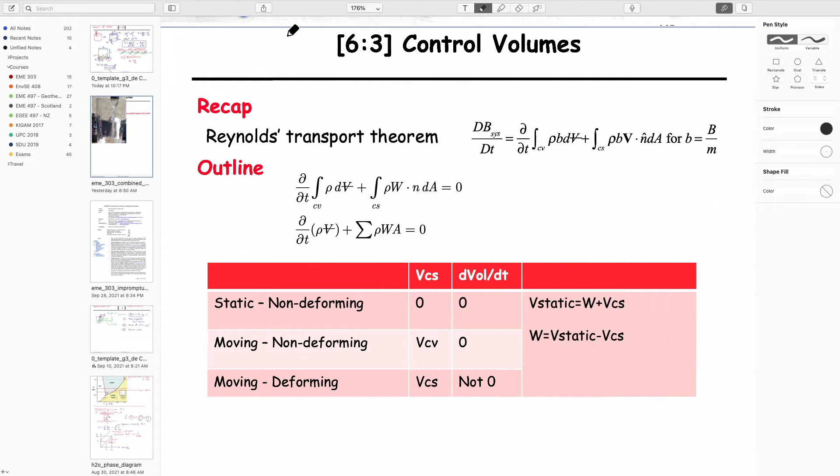So let's go back to our stuff. I will say that I'm going to do this in a much more simple way than I've done in the past. So if you want the gold standard version, last year's video for 6.3 is there. I'm not sure exactly how people take on the complicated way, and I think I have an easier way to explain it today anyway, so I'm enthusiastic to share that with you.

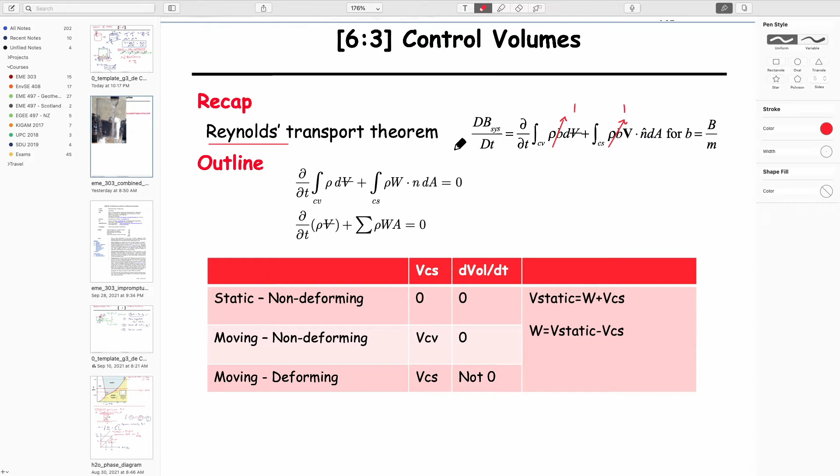So what do we talk about? We talked last time about the idea of conservation of mass. If we use Reynolds transport theorem, we can apply that to any quantity. We chose to apply it to mass, represented by this term B, which comes to be 1 in each of these cases - B is just mass divided by mass. This term on the left-hand side is 0, and you don't need to know that.

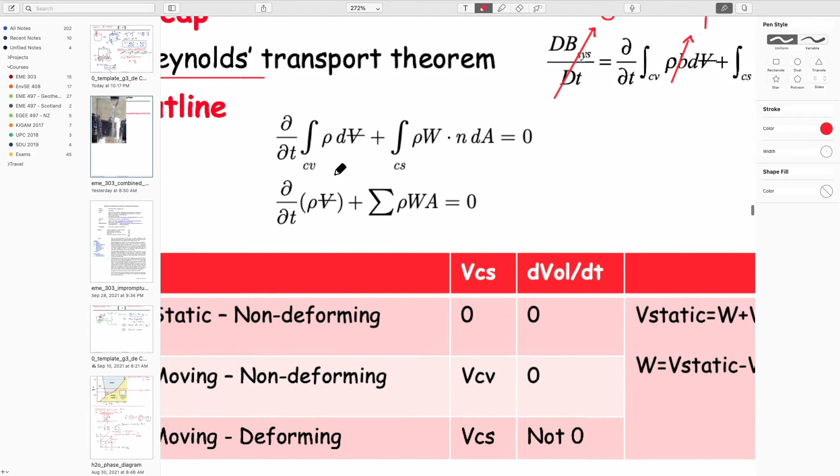What you need to know is what this looks like, and the equation that we will use is this. It relates to accumulation - so the left-hand side is accumulation. Perhaps I can write that: this is accumulation.

Mass out minus mass rate in, actually it's mass rate in, equals zero. That's the physical meaning of this expression. This term here is this, and this term here is this.

So am I using a blunt instrument? It seems a bit more blunt than normal. And so this can be written as this. So this is the expression that you'll use.

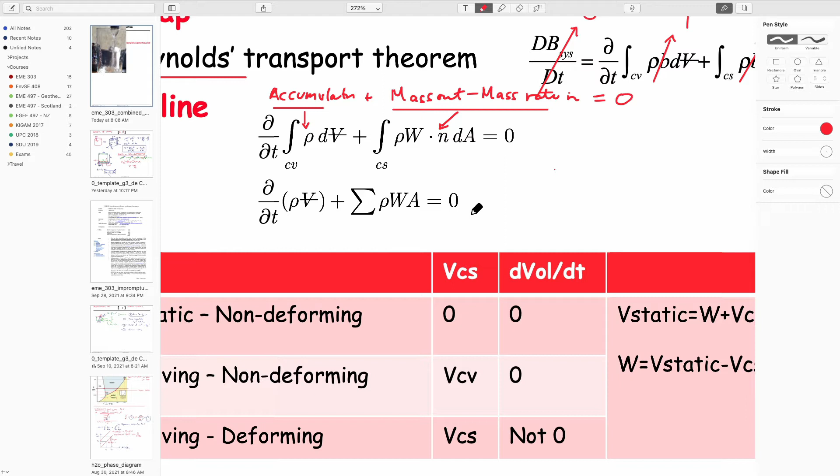You'll notice that we have taken this velocity here, and we've replaced it with a W. That's the one thing we do. So these are standard: time, density, density. This is a velocity, relative to the boundary velocity, which we'll talk about. We talked about this being a dot product, which just gives the sign to this that accounts for the mass in or mass out, and this is over an area.

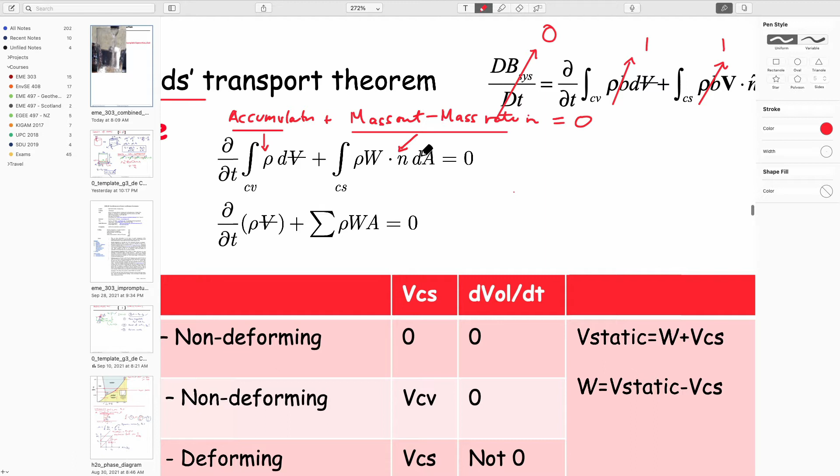The easiest way for you to think about this is to draw it as we did on Wednesday: you have a control surface, which is the surface that you complete this integral over. That surface encloses a control volume, the area volume inside it, because it has a distance into the page. We would like to be able to look at the velocities coming out of it and the velocity of flow into it.

The dot product that we have here represents this: if the flow is out, then it's parallel to the normal to the boundary, as we talked about last time. This is the unit normal, and so these are congruent with each other. So this is, in my parlance, positive out.

And it's negative in. Oh, that's my son saying rabbits. Does anyone say rabbits, rabbits, rabbits? First of the month? Yeah, same deal. You heard it here. Good luck for the rest of the month if you say that before you say anything else in the morning. Good superstition to have.

So this is a velocity out, and so the mass rate of flow out would be equal to the velocity relative to the boundary times the area times the density, quite literally. So that's what this is here: density, velocity, area. This is a mass rate, kilograms per second. And the sign of it depends on our knowing whether it's out.

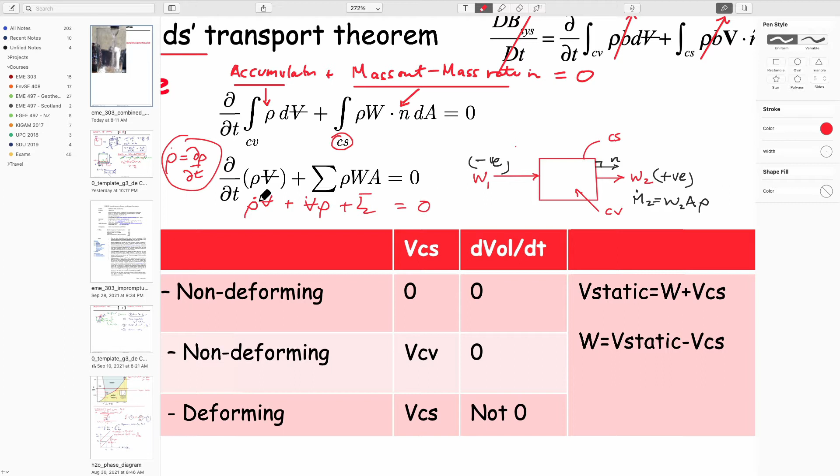This allows us to accommodate the fact that the density could be changing, like pushing air into a tire. The tire volume doesn't change very much, but certainly the density of the air changes. Or you're filling a beaker: the density of the water doesn't change because it's incompressible, but the volume of the control volume, which might be the whole surface of the water as it goes up, does change.

I guess we should mention that for these systems, if you look at time versus volume: if you're filling a beaker, then the volume of the beaker increases with time. So positive is if V is increasing, right? Just sign conventions we're talking about so far.

And I guess the other one would be that if you're pushing air into a tire with time, then density would do this, and this again is positive. So if density increases with time, it's positive. If volume increases with time, it's positive. And if flow is out of the system with time, it's positive. We just have to account for those conventions, and it'll appear normal when we do these things. So that's the first part.

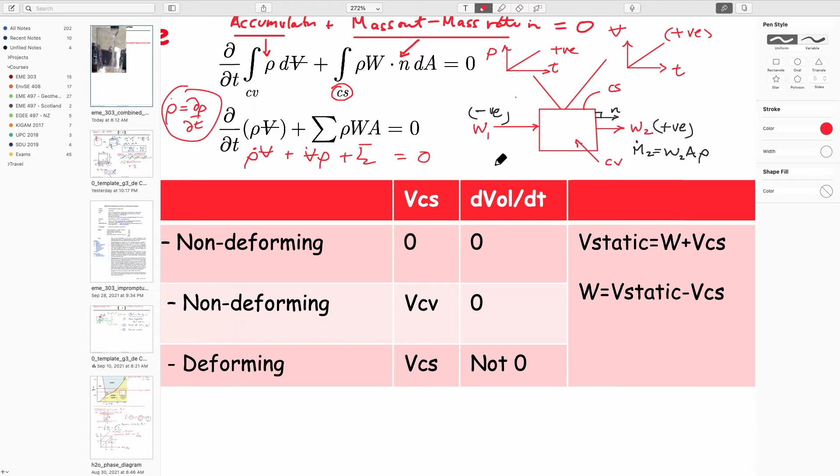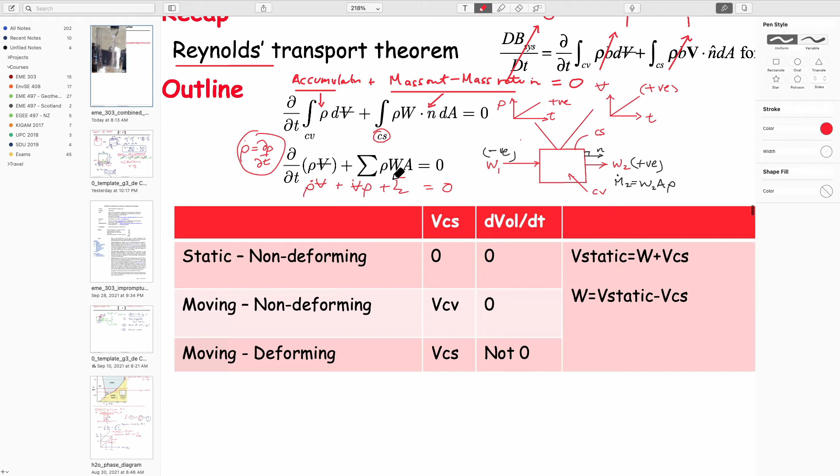The second part is that we've changed this velocity here to a relative velocity. And so we've just looked at the boat. I love drawing this boat. Here we go, this is my fire tender. Oh, it's fantastic.

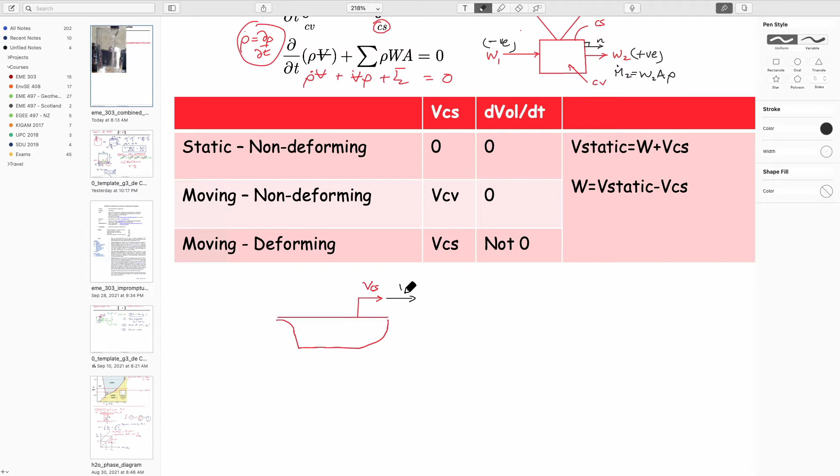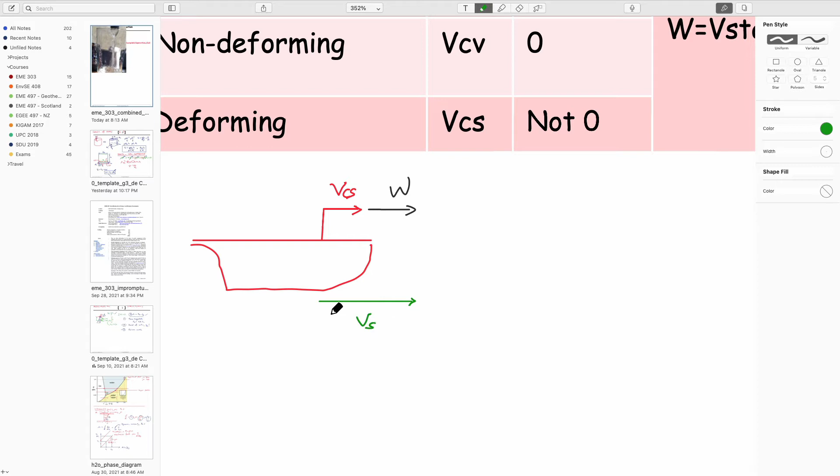This fire tender is moving with some velocity of the control surface, and it's squirting water out of the control surface at some rate W. If you combine both of these together, and I draw it here, then if you're standing on the dock watching this, you see the boat moving at 1 meter a second. You're squirting water out at 1 meter a second. So the velocity to a static observer is 2 meters a second. That's what you see: boat's moving, squirting.

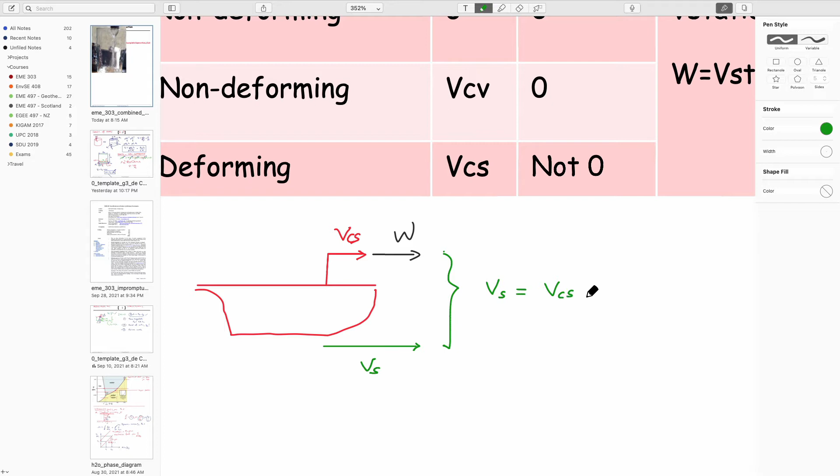You sum those, it's a vector sum. These are vectors, so actually it's not just a magnitude in the x direction, but there'd be x, y, and z as well. But let's just think of it as one for now, not worry about the fact that they're vectors. So we can write, because they're vectors, if we take these two together, that velocity static is equal to the velocity of the control surface plus the velocity coming out of the system.

We could also draw a control volume around here. So this is the control volume that we're looking at. Really, if you're squirting water out of here at 1 meter a second, it doesn't matter what the boat is doing. If you have 10 kilograms of water in the boat and you're squirting it out at 1 kilogram per second, then it'll take 10 seconds to deplete. It doesn't matter if the boat's going in any particular direction or you're squirting in any particular direction, you'll deplete the mass within the boat in 10 seconds, either way.

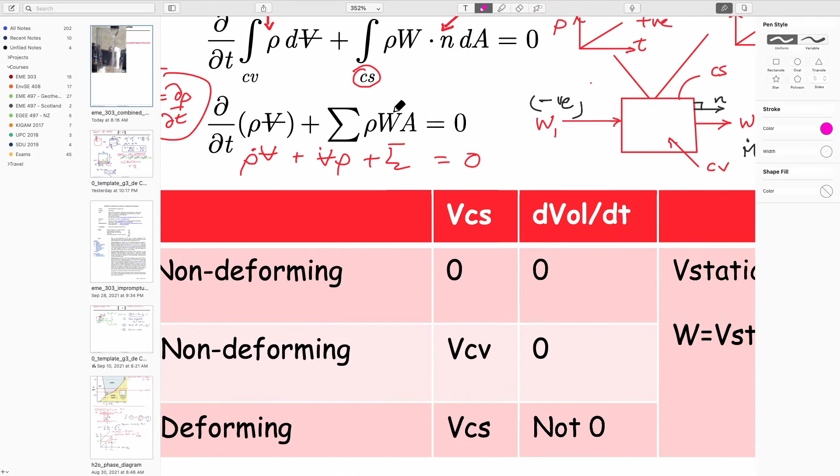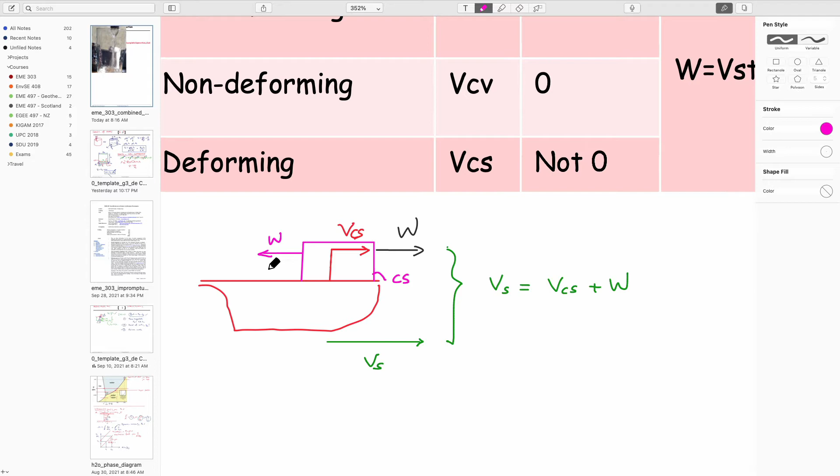All I'm making the point that the reason W is here instead of this velocity here is that it makes sense that if you're conserving on a control volume, so if this is our control surface here, this magenta line, then it makes sense that we use the relative-to-the-control-volume velocity in depleting volume from that control volume. Right? That's all we're saying. So this table merely makes the case that this is what the behavior should look like.

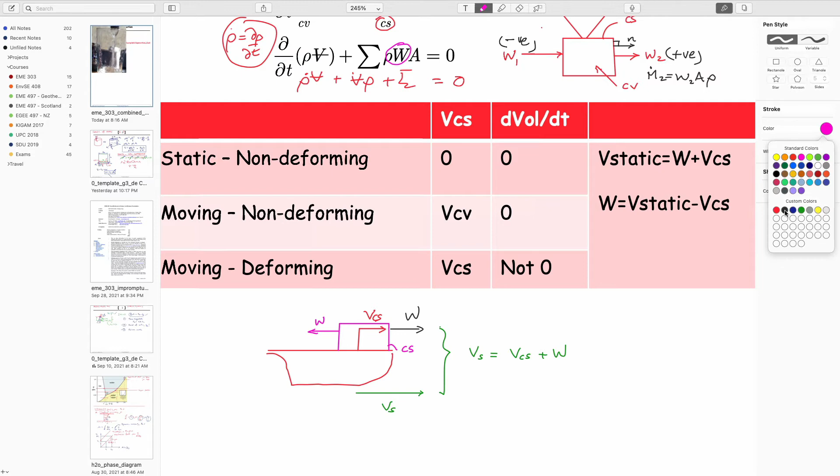I can get rid of this right-hand side, I think. We have these three different cases. Remember, we talked about the pipe. We could take a section of the pipe and have a control volume in it, and that this was static and non-deforming. In this case, the control surface is moving at a velocity which is 0, and because it's non-deforming, staying the same size, the volume with time is not changing either. This is V dot, uppercase V dot.

If we have a moving and non-deforming one, well, that, if I can draw it, is my jet engine. This isn't changing size, but it's translating. This is the velocity of the control surface, and it's actually the velocity of the control volume, right? Because the control surface at the front is moving at the same rate as the control surface at the back, since this is not concertina-ing, getting larger. So really the velocity of the control surface has to be the velocity of the control volume. Kind of semantics maybe. And of course, non-deforming, so it's not changing volume with time.

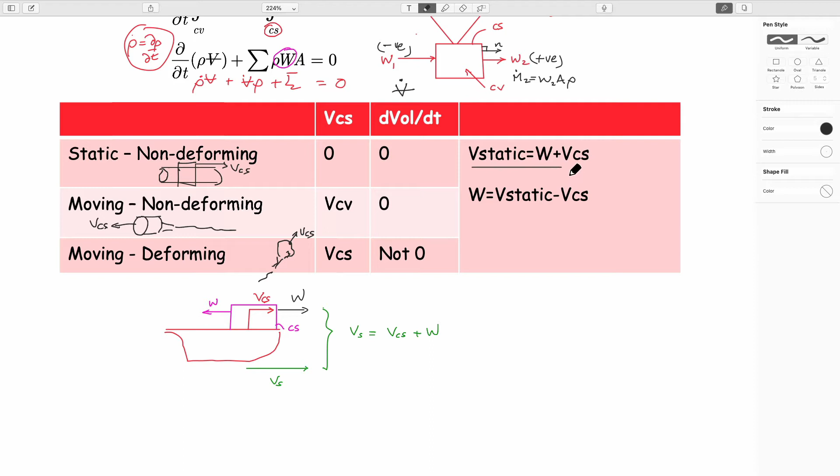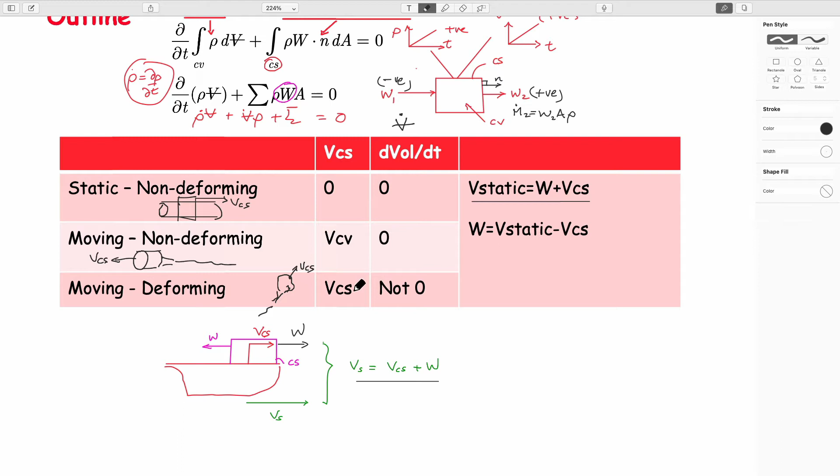Since we've said it's important to define our behavior relative to the boundary velocity, we might want to rewrite this equation this way. We'll need these concepts when we talk about the other conservation law, and we'll use them today to illustrate exactly what I'm trying to say.

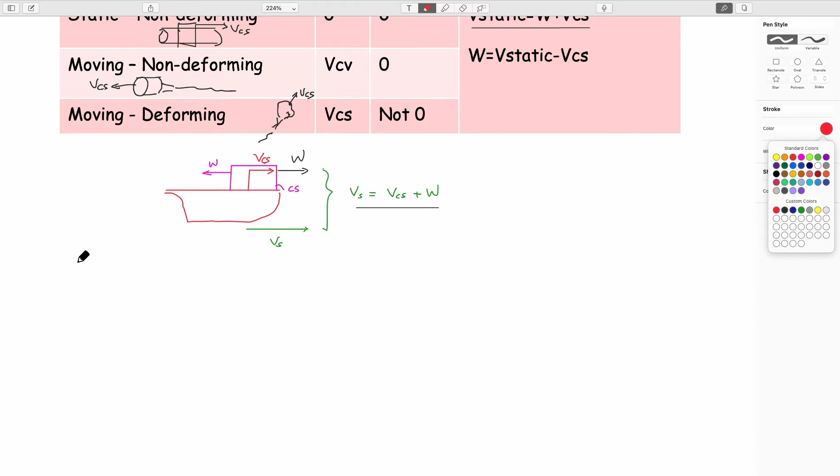So let's do something with this instead of just talking about it. So what I plan to do is... is this writing big enough now? Yeah, plenty big enough for you. So what am I going to do?

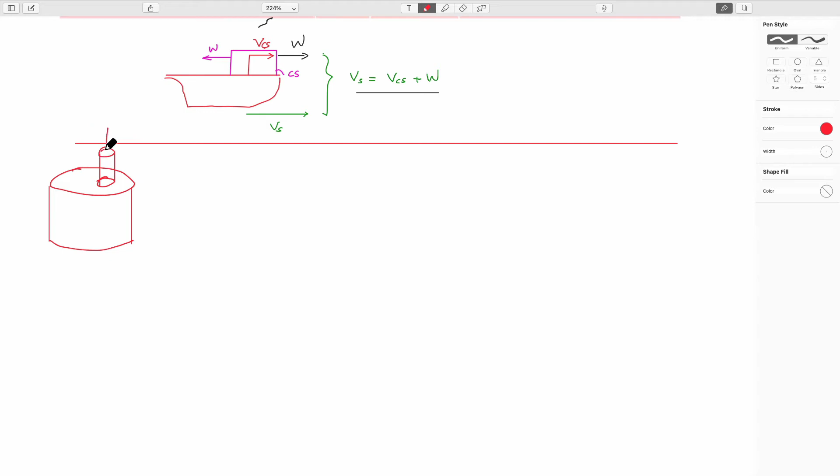What I'm going to do is take the geometry that we looked at. This is the problem geometry, so it's a beaker. In the geometry you saw with the glass, you have a jet of fluid coming down and slowly filling up this volume. That's the one we looked at, but that's just too difficult.

So I'm going to translate that into something equivalent but different. Instead, I'm going to fill it from the bottom, with fluid coming up into it.

The fluid comes up at some velocity v1. It has a surface here, and I'll have a height which is h0. I'll have an area A1, which is the area of this jet.

Remember, the other setup was difficult because not only is the fluid coming down, but as it comes down it tapers, since the water accelerates as it falls. We get rid of these problems just by filling up the beaker from the bottom. We have some height to this, h, and some area of the bucket, and we use that to write our equations.

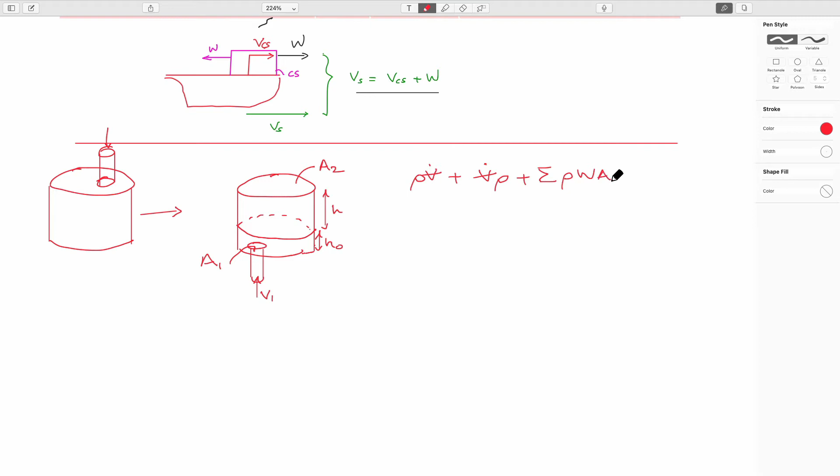So you'll be sick of this equation - well, you might be sick of it already. But this is necessary for us to write. So that's the expression we have.

So what do we have in this particular case? I guess I did that wrong, let me get rid of that. One of these needs to be a rho dot, the change in density. So what's going on here? It's water coming into it, so the change in density is probably trivial, and we can get rid of some of these terms - this term is going to be zero, we don't care about it.

We have water coming in through the bottom, so we worry about that, and we have a rate of change of volume occurring. The volume, depending on how we draw our control volume, is going to change, so we need to take care of this.

So if we want to solve how long it takes to fill this container, what do you do? It's probably easiest to write this as: if you know the volume of the bucket, and you divide the volume by the rate at which you fill it, this equals a time - volume per time, one over time is this. So you have a 10-gallon bucket, you pour in a gallon per minute, it takes 10 minutes to fill. That's all that is, and that's the easiest way to do it.

In this particular case, the volume is equal to, in very simple terms, A2 times H. The volume rate is going to be equal to V1 times A1, and that's your answer. We're going to do this problem multiple ways, and we should always end up with this intuitive answer you've already got: A2H divided by V1A1.

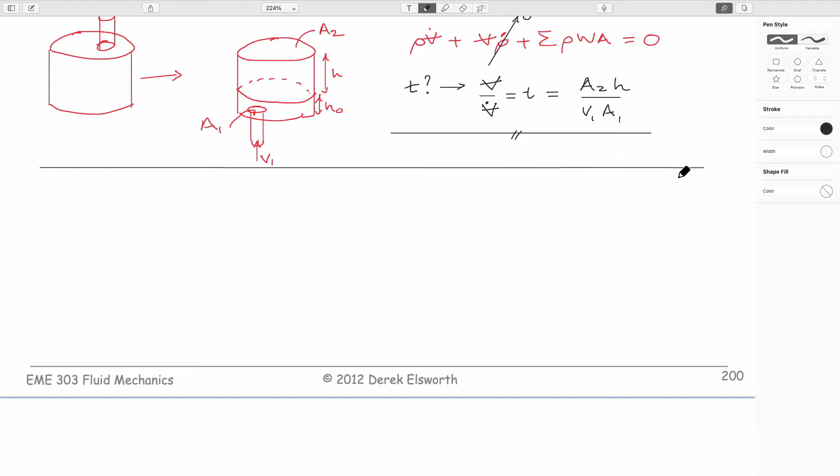So we start off with an amount in there just because it's easiest for us to do that, but the time it takes to fill the rest of the thing is this amount of time here. So what we could do is divide this up - if I draw a line here to cap it off, we're going to do each of these, this one and this one.

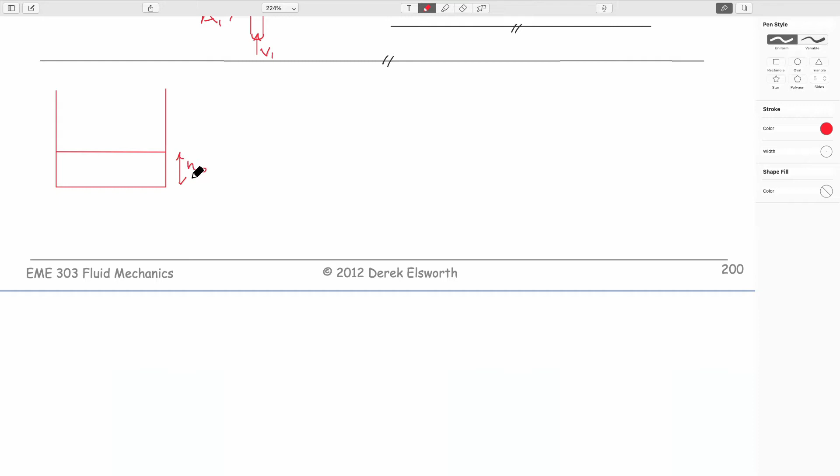So this is how high the water is up to, this is H0, I guess, what we've called it. This is going to be the rate at which we put water in. So over a portion of this, we have water going in at some rate, V1. This length here is A1. And this surface here is rising at some rate.

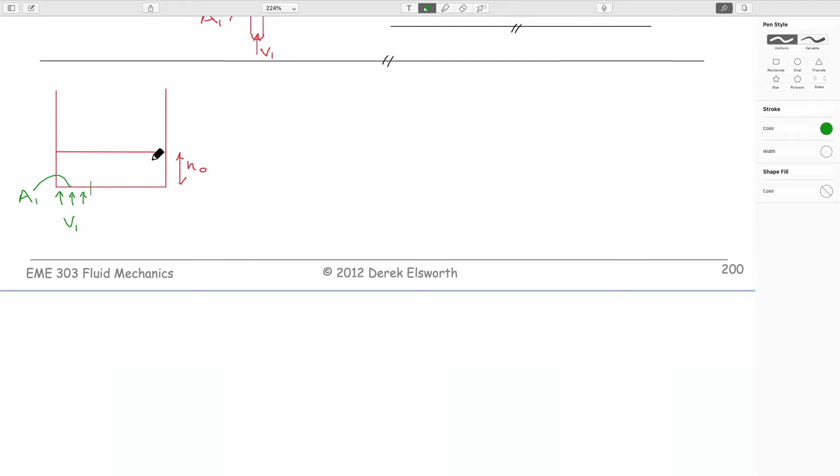And so what do we want to do? For the first of our conditions, we have, this is going to be blue. So this is 1: static, non-deforming.

So let's draw a control volume. So that's our control volume. So we can write our expression if we like for that. So I guess I want to switch back to this.

So what do we have? Rho V dot plus V rho dot plus sum of rho W areas equals 0.

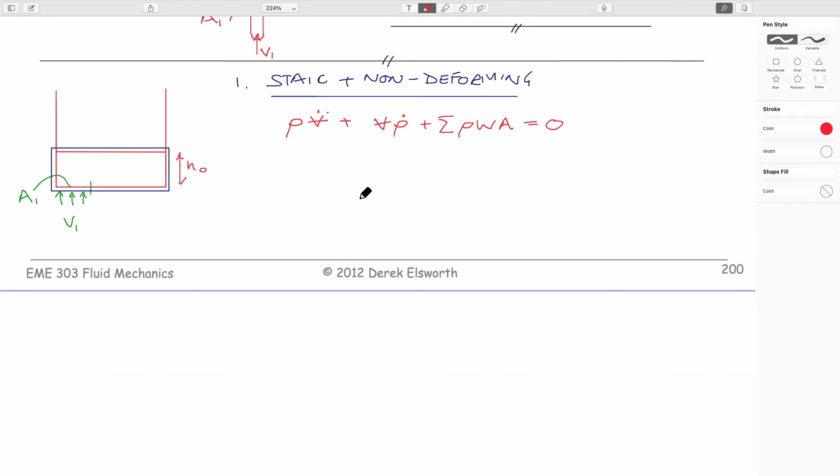What do we have going on here? Well, we clearly have a couple of things going on. We have some fluid coming out of the top of this volume at some rate. This is our control volume, I guess I could label it. This is going to be V2. This is going to be area A2, if you want to put that there. It's not really the cross section, right? Because it's an area, not a length.

And so this is just the answer that we already had. So if you write the rate of change of volume, it's going to be 0 because it's static. I missed out some letters. The rate of change of density is going to be 0.

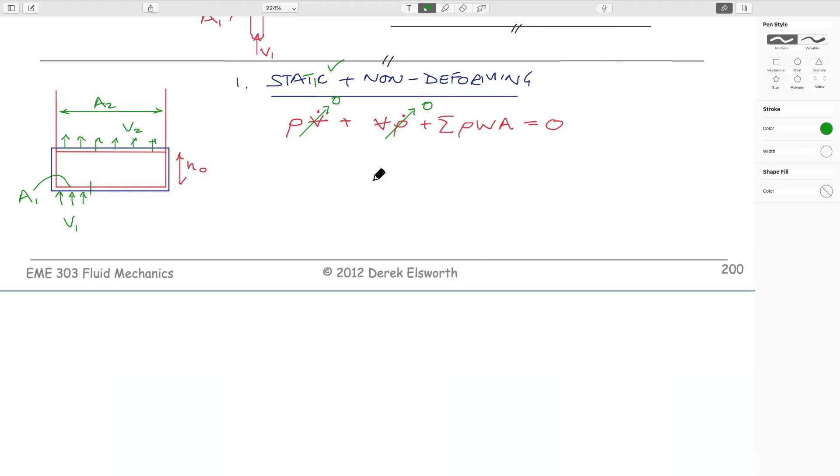And it's going to be just the sum of these two components. So if we write this out in longhand, it's going to be quite simply rho V1 A1 plus or minus rho V2 A2 equals 0. What's the sign convention? Flow in is negative by our convention because of what we said about this boundary here. This is the normal, so this is going to be negative V. Flow out is positive for the same reason, so this is going to be positive.

And so we can get rid of the densities if it's not compressing. So V1 A1 is equal to V2 A2. And so we can just use that to define V2 is equal to V1 A1 over A2.

And how do we calculate how long it takes to fill? Well, we can do it in terms of a velocity, right? This is h. So velocity is equal to length over time. So I guess we should rearrange that in terms of time. So time is equal to...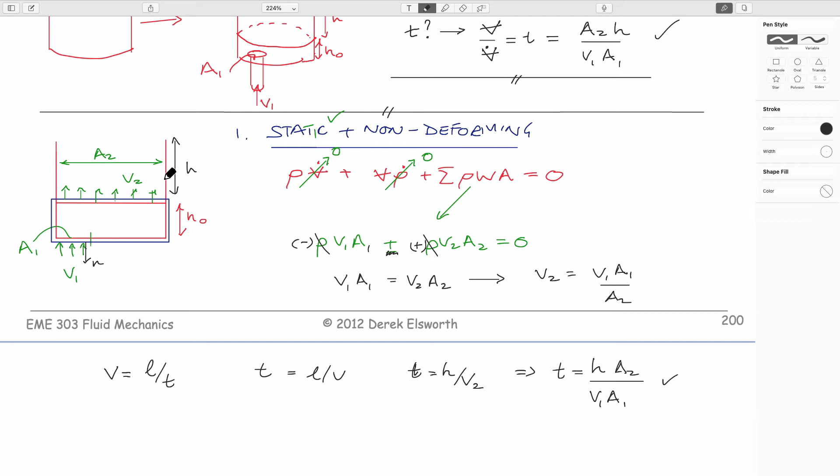So the intuitive way to solve this is exactly what this gives you, the velocity coming out of this static control volume. It doesn't solve this directly because you have to calculate how long it would take to rise up here, but that's the result that you get. So that's the first of our problems.

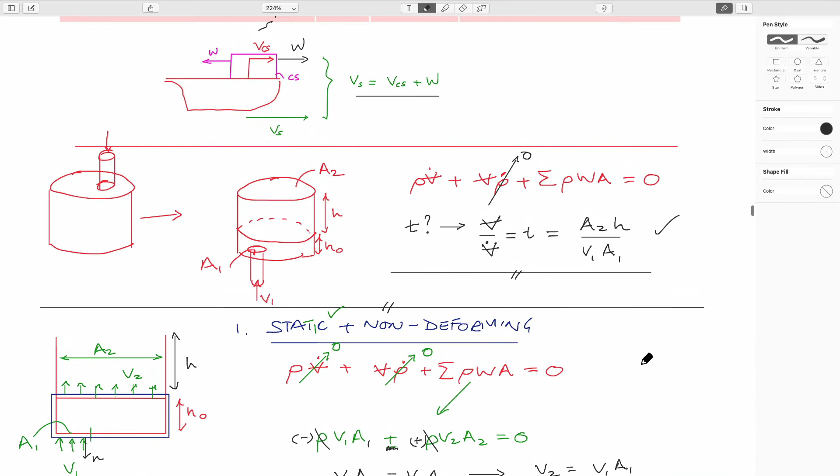So the second is moving and non-deforming. Let me see how clever I can be with this. So let's get back to this. So I guess this is number 2. So this is moving, but not deforming.

So let's see how we do this. Let me see this. All right. Ah, perfect. God, I'm so pleased with myself.

So let's see if we can draw this same container, but with something else done. This is a non-deforming container, so it has to have the same control volume, but what this container can do is physically float up to the top of the bucket. And that's what we're going to allow it to do.

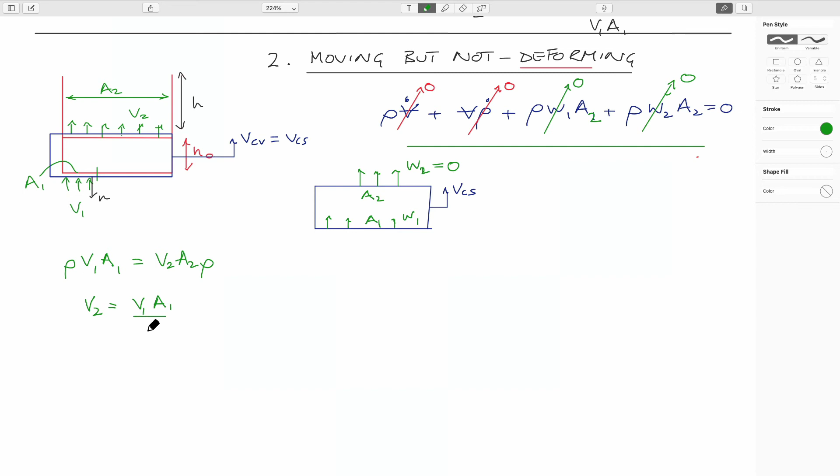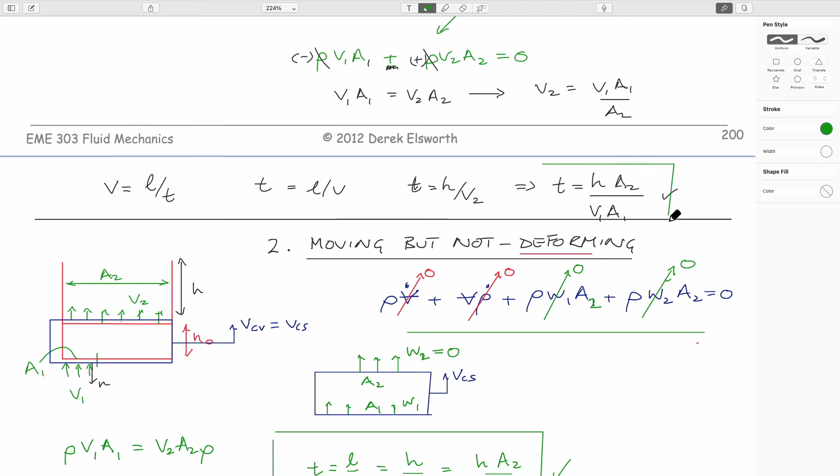And we again get V2 equals V1 times A1 over A2. And again, we have to use this expression: T equals length over velocity, which is the length it needs to travel, h, divided by its velocity v2, which equals h times a2 over v1 a1. Not surprisingly, since it's the same problem, we end up with exactly the same result here, as we do if you think about it in terms of how long it takes to fill a bucket.

1 kilogram a second, 10 kilogram capacity bucket, takes 10 seconds. That's all we're doing.

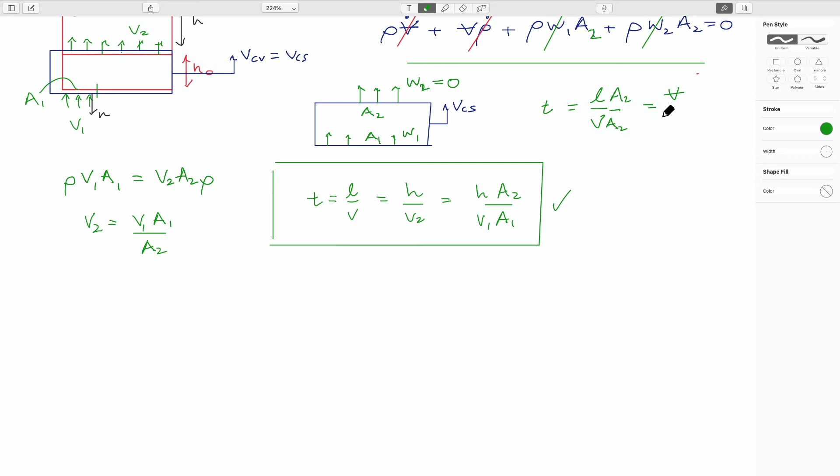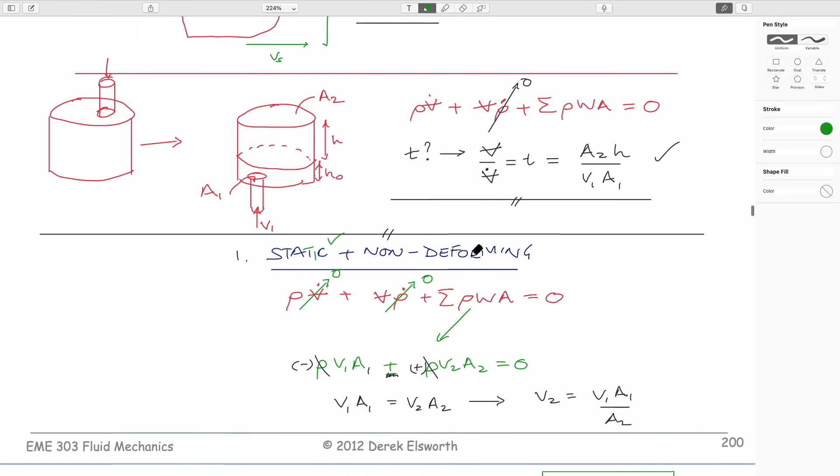So instead of writing time as length over velocity, we could also multiply both top and bottom by area 2 and area 2, and this would become a volume, and this a volume rate, just as we talked about before. Whether you use mass rates or volume rates, if the density isn't changing, it doesn't matter much.

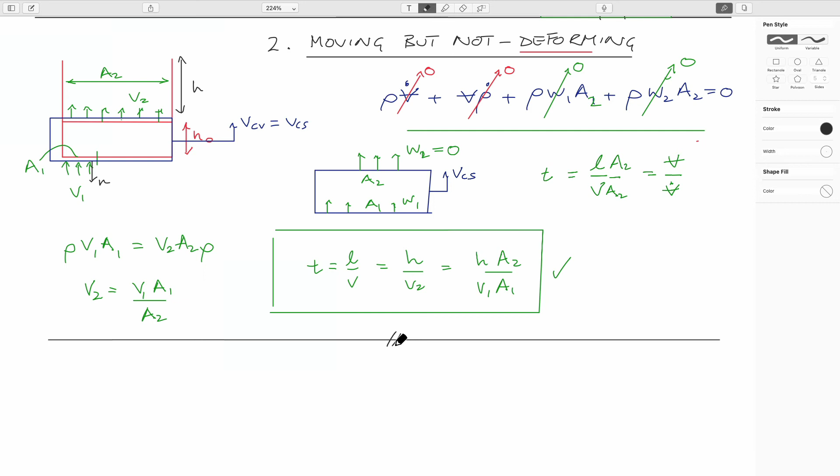Okay, so it becomes a bit academic at some stages, but let's do the other one as well. We've talked about three of these particular ways of doing it. And believe me, if you think this is complicated, look at 6.3 from last year and see if your head explodes based on that.

Okay, I'm going to be fancy again. Is it worthwhile me trying to copy these, just like I did last time? I guess it'll move some of it down. Some things we don't want moved down. Okay. And again, see if I get rid of the control. So, all right.

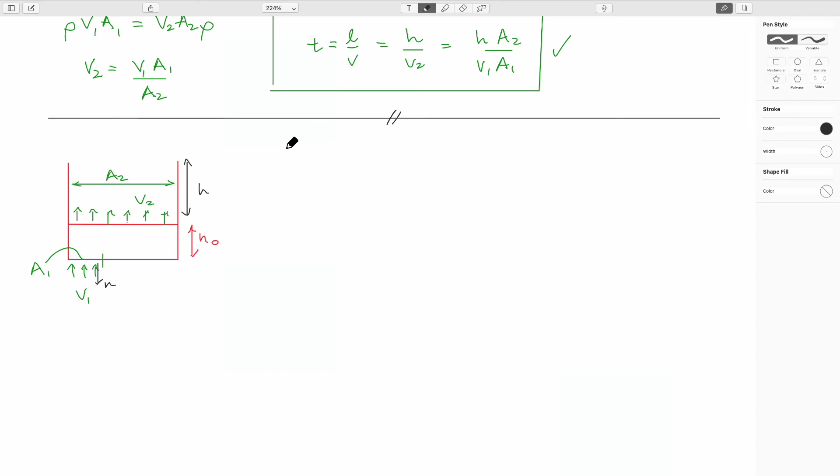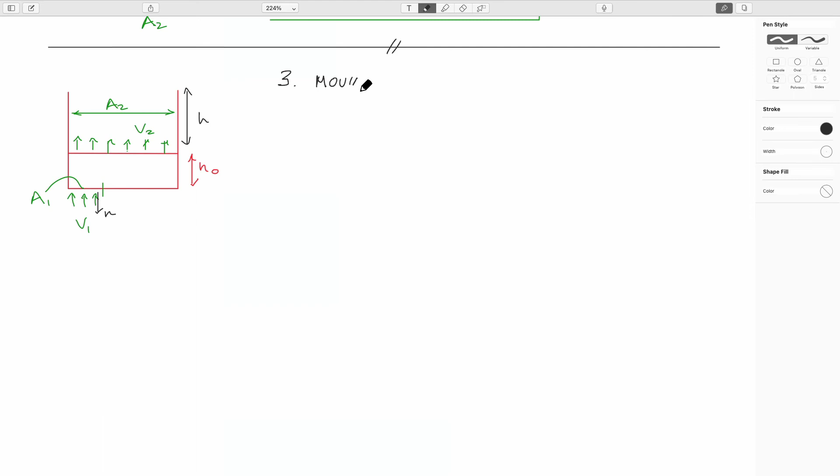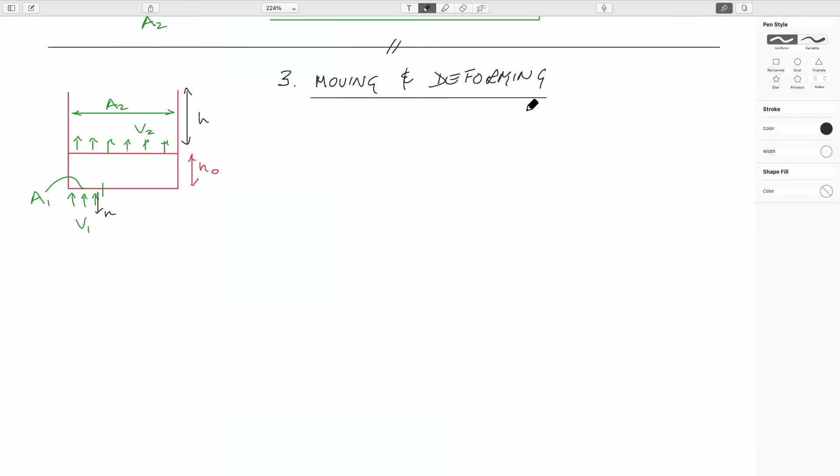Where's it gone? So the third one is going to be, what is it, what order do we put it? So it's moving and deforming. So for this, what are we going to do?

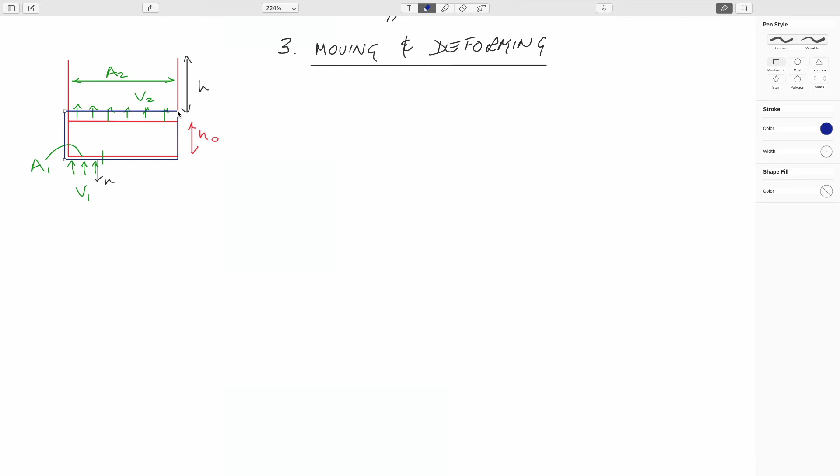We're going to do the same as before. I'm going to draw myself a nice little box around it, and this box is now going to be different. So this is the box at how it starts, but instead of translating upwards, it's going to do this: it's going to grow with time as it goes upwards. Physically, it's going to be anchored at the bottom, so we have to define what the behaviors are.

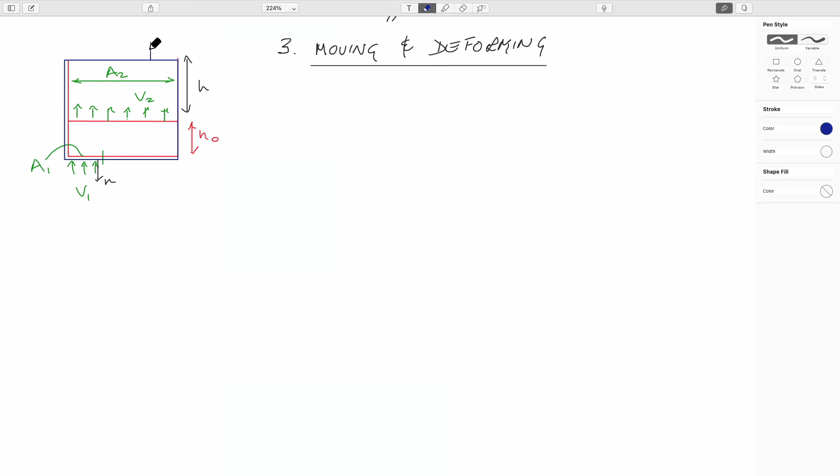This is going to be the velocity of the control surface. The velocity of the control surface here is 0. The velocity of the control surface on the other sides is 0 as well, but we don't care about those. So it's going to grow from this magnitude here up to this.

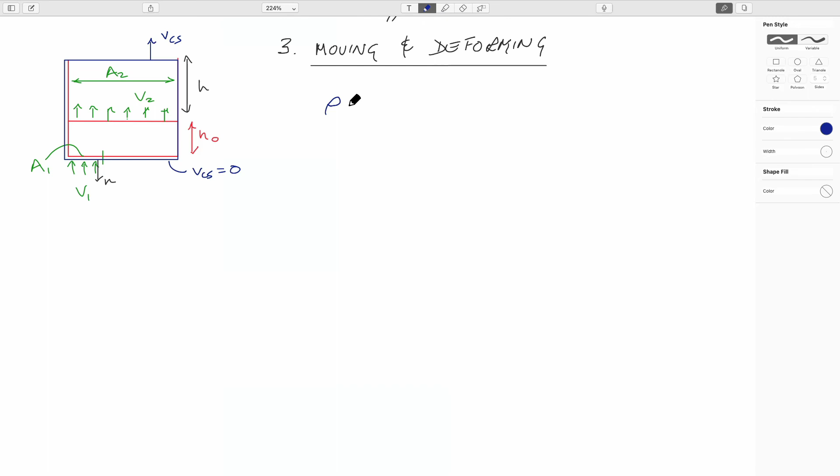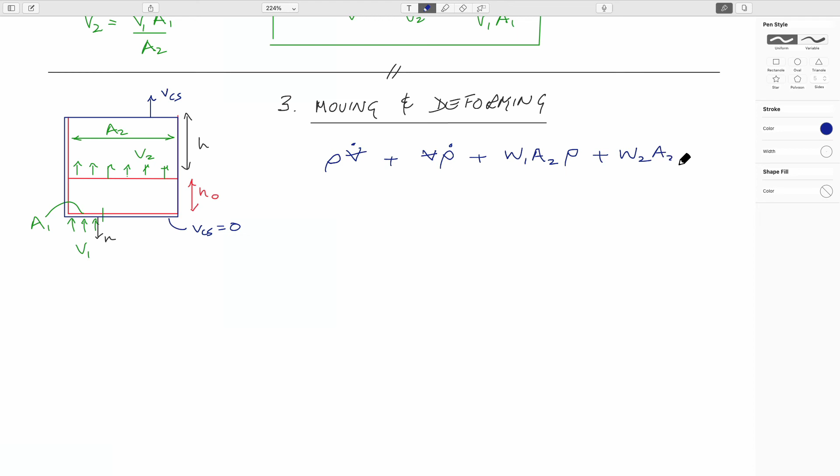So again we have to write that same expression: density times rate of change of volume, you should write it the same each way, plus volume times rate of change of density, plus W1 A2 rho, plus W2 A2 rho — I deliberately put A2 there — equals 0.

And I'll draw the box separate from itself, just to get an idea of what's going on. It's quite straightforward — I say everything's straightforward — this is the velocity of the control surface, which is equal to 0.

And we can look at the relative velocities of the fluids. The fluid is coming in through the bottom, so we can look at that fluid velocity here. What's that going to be? This is 0 because nothing's happening. The velocity here is going to be into here, it's going to be W1.

Actually, I don't want that to be — I made a big point of making the case that I wanted that to be A2, but I don't. What's going on? A1. So this velocity here would be what we called V1 before, A1 and density.

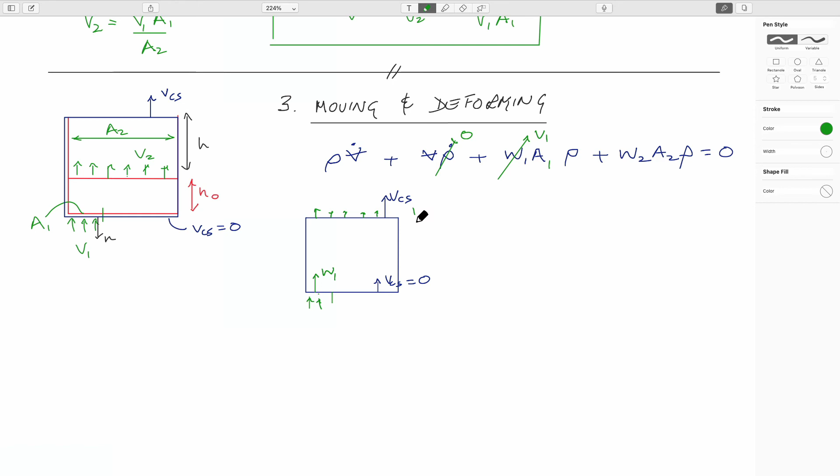What is the velocity on the top surface going to be? Well, again, this is moving with exactly the same velocity as the water — it's the top of the froth on the beer, and so it's moving up. So W2 has to equal 0 for the same reasons as in the previous case, which I've erased, because it was translating up as a float. In this case, it's translating up, but it's stretching the volume, and clearly this is not going to be 0.

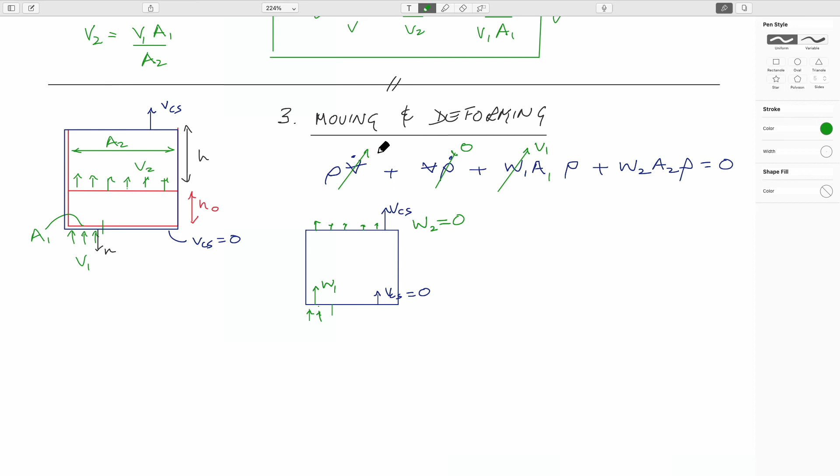And so we end up with an expression which is density times rate of change of volume plus V1 A1 rho. This is a velocity, and if we draw our unit normal outwards, this is negative, so that just means the velocity is negative and it's equal to zero. We can probably get rid of the densities.

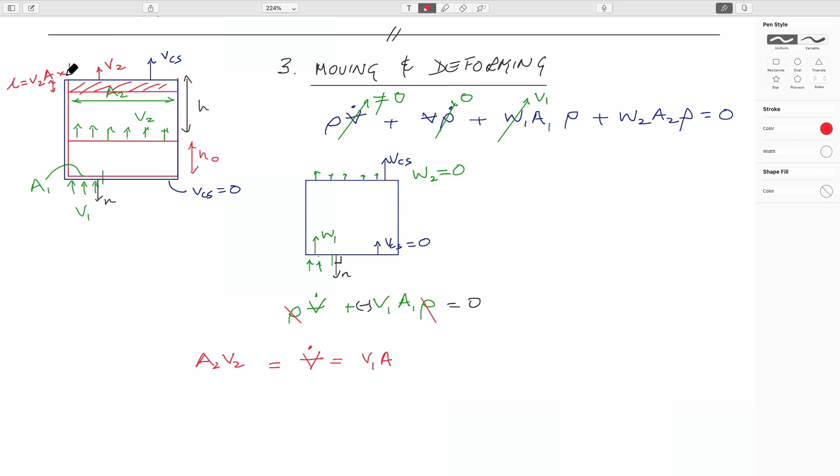So in other words, the volume change is equal to V1 A1, because this is negative. What's volume change? Volume change would be area 2 times V2. An incremental change in volume is given by this surface going up at velocity V2, making a new volume, which gives you this length. So this length is equal to V2 A2 times T.

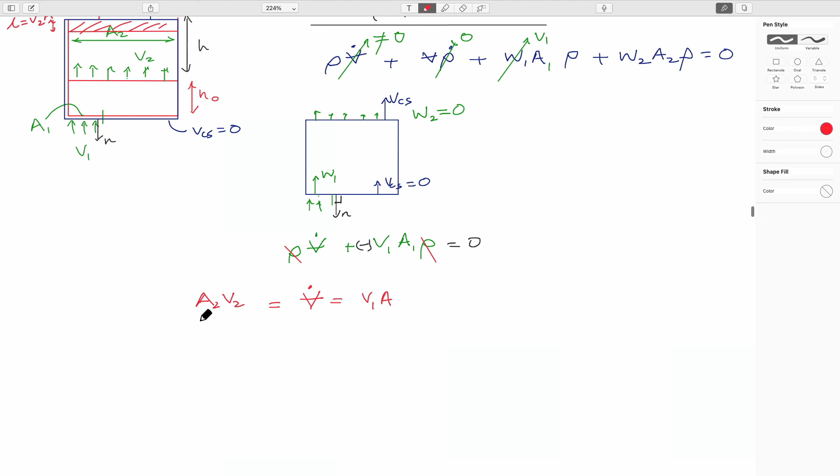So we got rid of this. This is volume change: area times velocity per unit time. Velocity is per unit time.

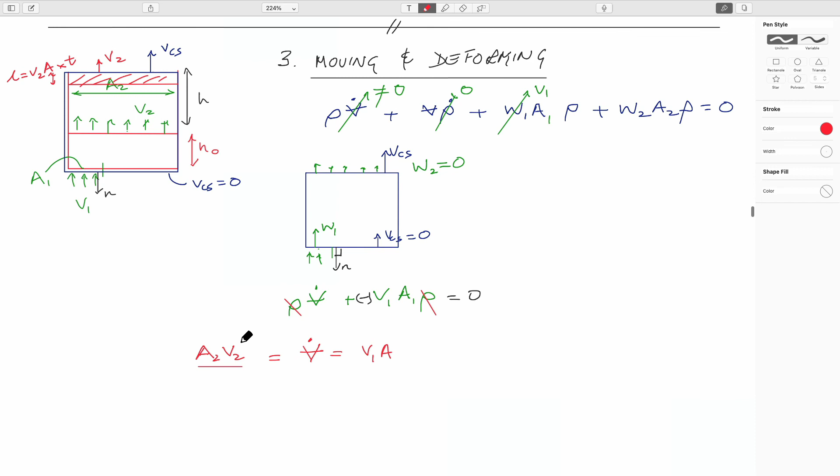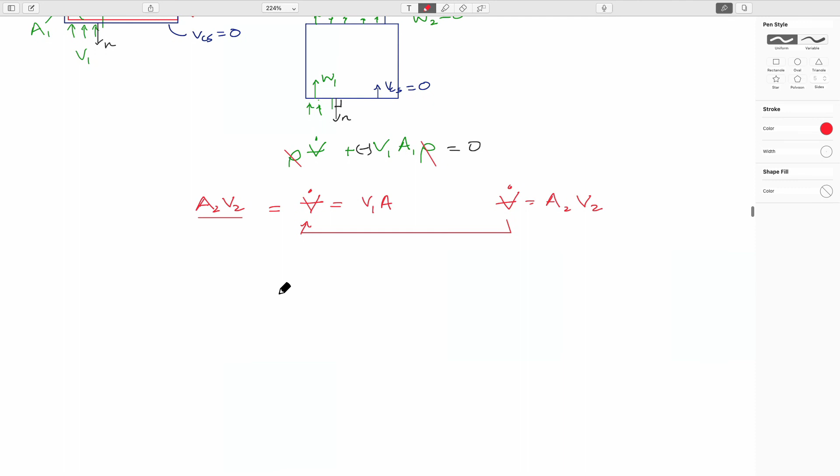And so if we rearrange that - using V1 A1, V2, V dot - this is V2, by definition. There's no reason we can't combine these two, so V1 A1 equals V2 A2.

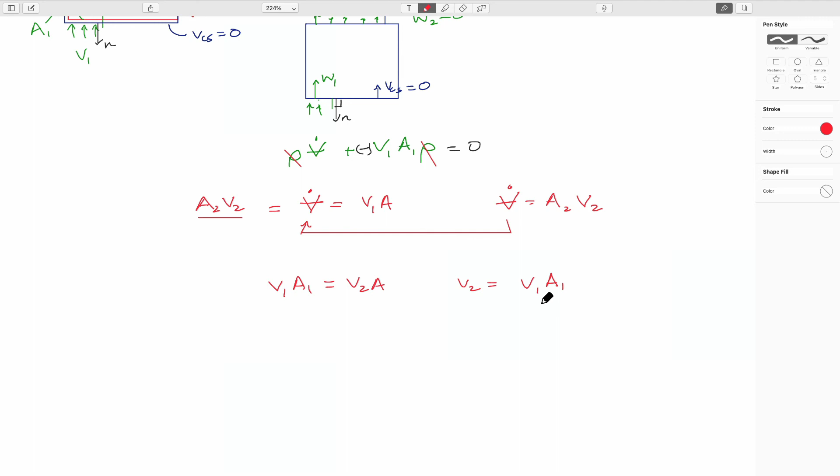And V2 is equal to V1 A1 over A2. We know that time is equal to length over velocity, which means the time is h2 divided by v2. If we take this down here, this is equal to h2 a2 over v1 a1.

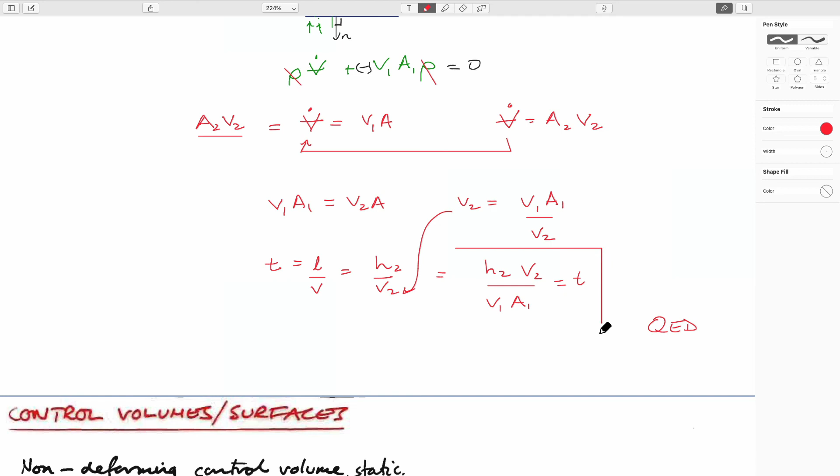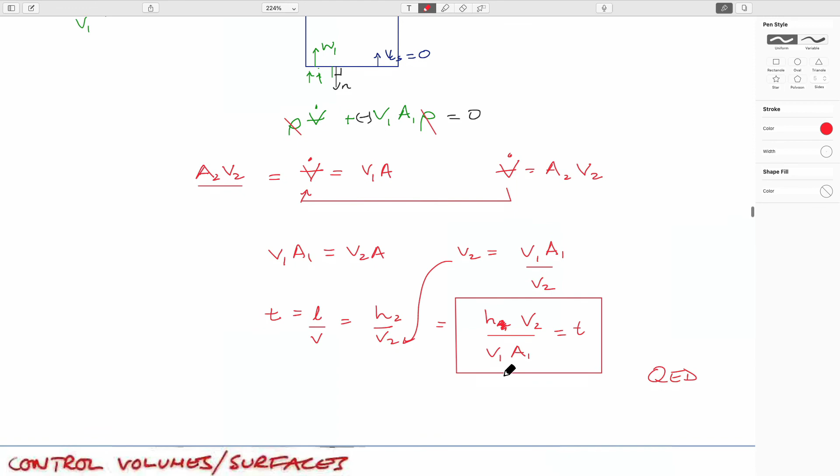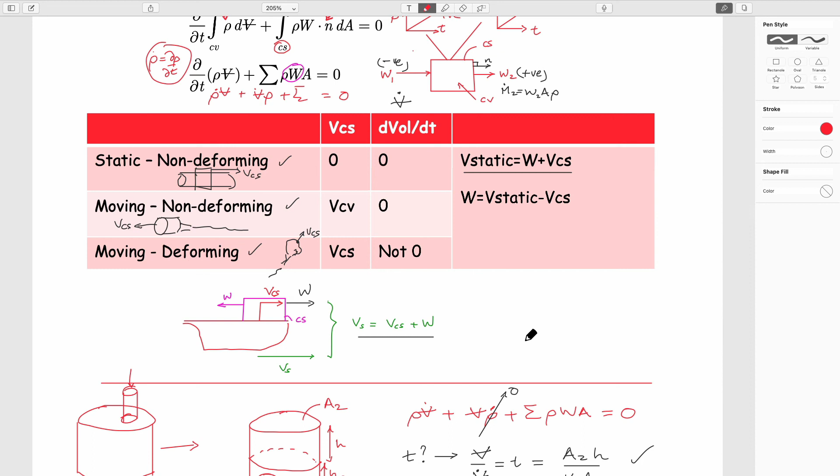V2, V1, A1. So the point I've tried to make is that irrespective of how you solve this problem, it's physically the same problem. There's no doubt about that. You're filling up a beaker or a bucket from the bottom, incongruous in some respect, but it's physically the same problem. We can represent it in a variety of different ways, and no matter how we describe it, the solution has to come out the same because we're solving the same problem at the same time.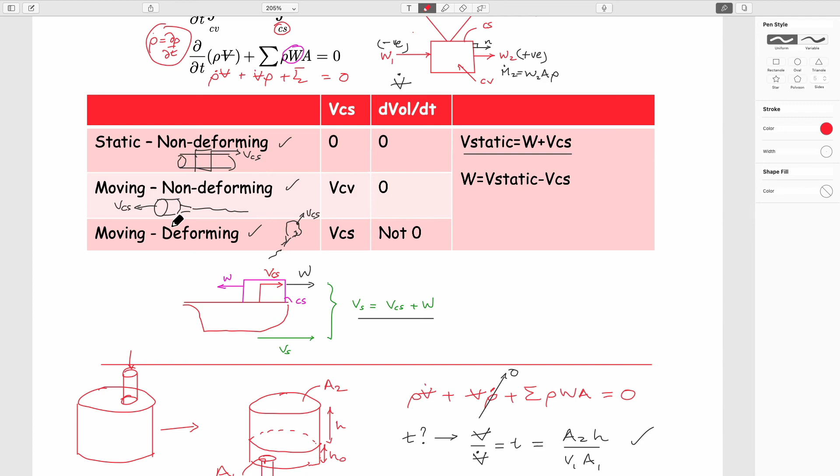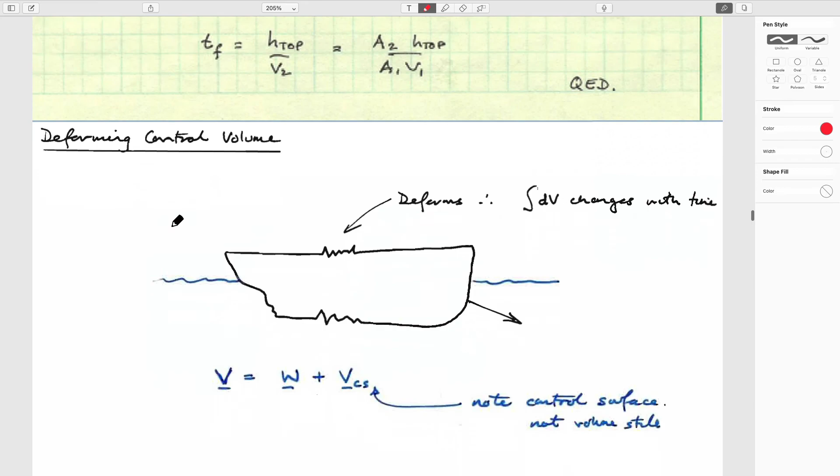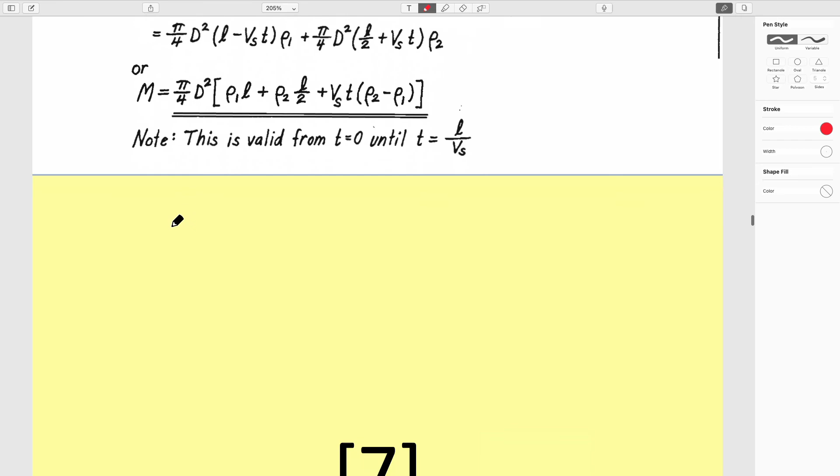So that's the way of dealing with it. If you want a more complicated way of doing these, you can see what these are - I don't think this is beyond what we've basically done in these 1.5 pages. It's the same idea with a couple of examples which I won't go through. But that's all we'll do on conservation of mass - it allows us to define rates at which it takes to fill volumes. Sometimes you'll use it with conservation of momentum to solve things, but this is all we'll talk about for conservation of mass.

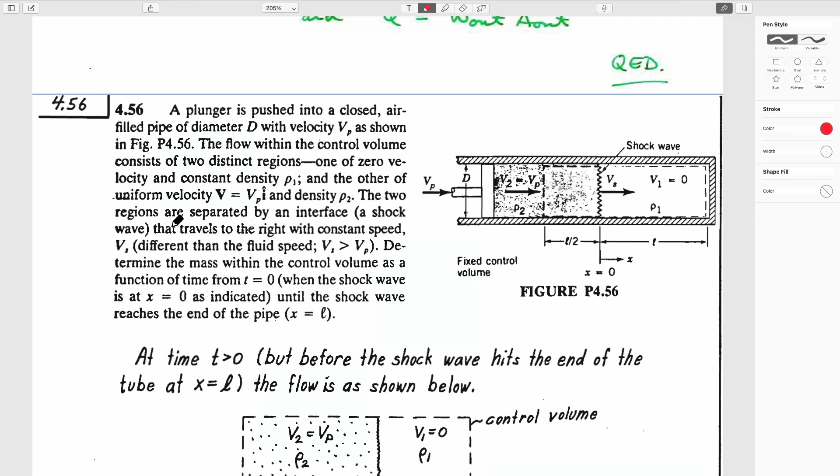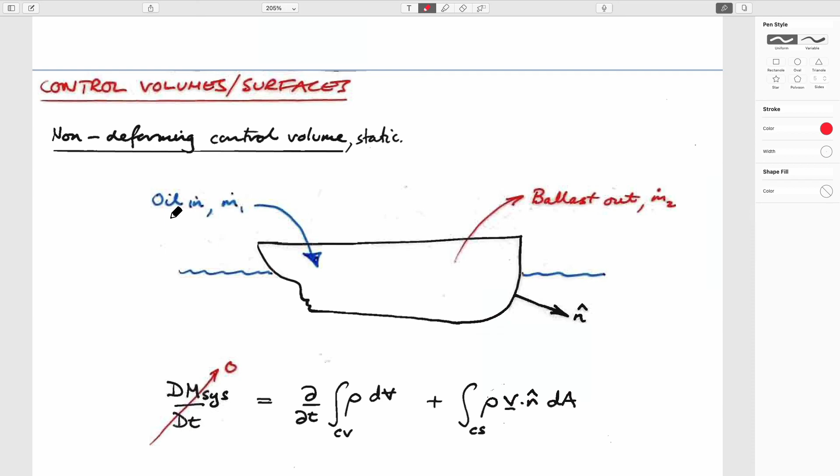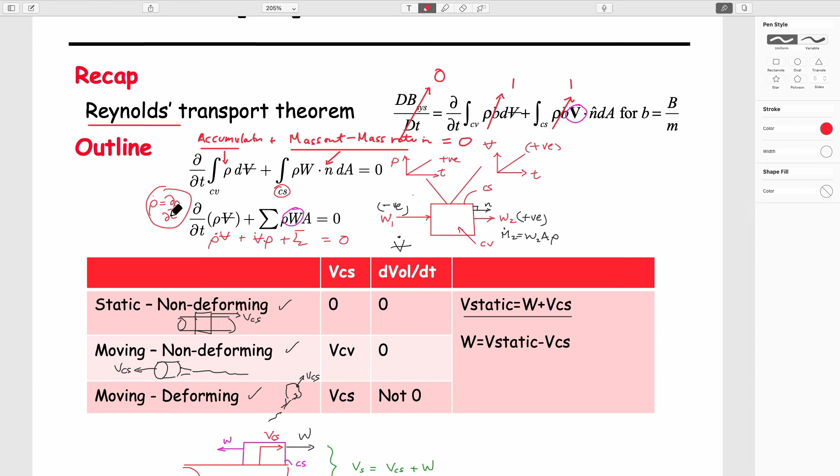work from the same principles in that we'll use this kind of unwieldy thing called Reynolds' transport theorem, but instead of conserving mass, which we've done today, in different reference frames, we'll start talking about conservation of linear momentum - conserving not mass, but mass times velocity. It becomes a bit more complicated because mass is a scalar quantity, it just has magnitude. Momentum is a vectorial quantity that has both magnitude and direction, mv. So it becomes a little more taxing, but the same principles apply, and we'll work on those next week. Okay? Thanks very much.